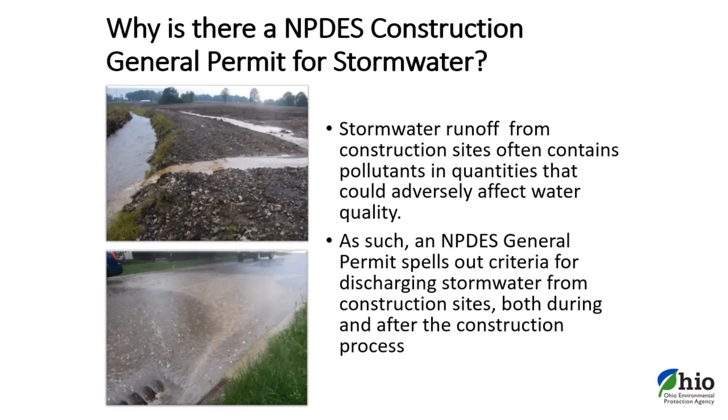Next, we will discuss the impacts during construction. When uncontrolled, runoff can lead to erosion of sediment. Sediment is a leading cause of impairment and adds nutrients to streams. In addition, channels lose capacity and habitat due to deposition of construction site sediment.

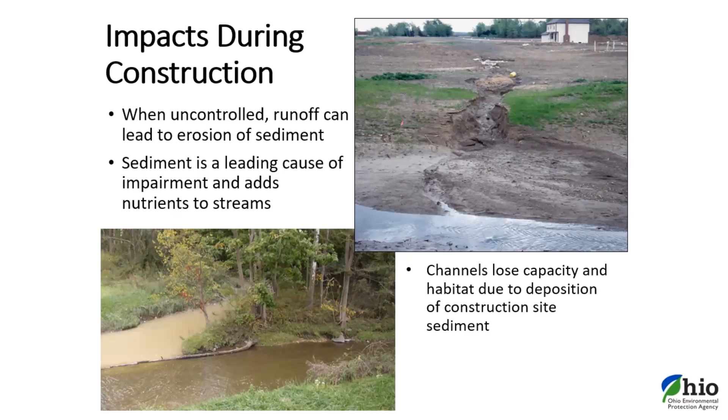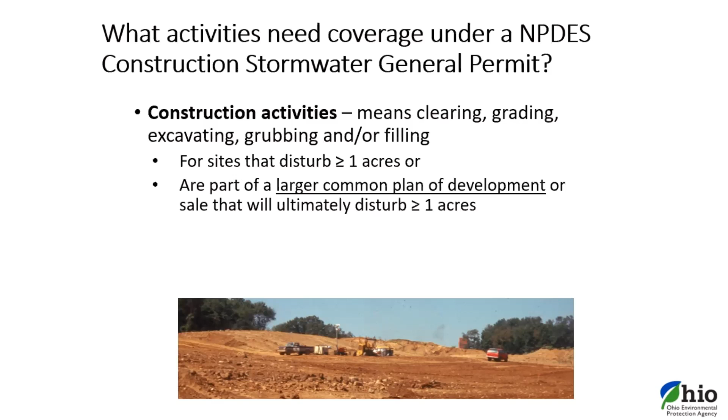Now that we have discussed why you need construction stormwater general permit coverage, as well as potential impacts, let's see what activities need coverage under the construction stormwater general permit. Construction activities means clearing, grading, excavating, grubbing, and/or filling. It does not necessarily mean that building activities are occurring at that time. This would apply for sites that disturb 1 or more acres or are part of a larger common plan of development.

Now let's go over how and when construction stormwater permit coverage is obtained. You will need to submit a notice of intent electronically via Ohio EPA's Electronic Business Center. You will need to certify that you have a compliant stormwater pollution prevention plan. As far as the timing, the stormwater pollution prevention plan must be fully developed for all areas of disturbance prior to the NOI submittal. The NOI form must be submitted at least 21 days prior to construction, and individual lot NOI applications must be submitted at least 7 days prior to the transfer of ownership. As lots are sold, their portion of the SWP3 and responsibility must be communicated and passed on to the next operator.

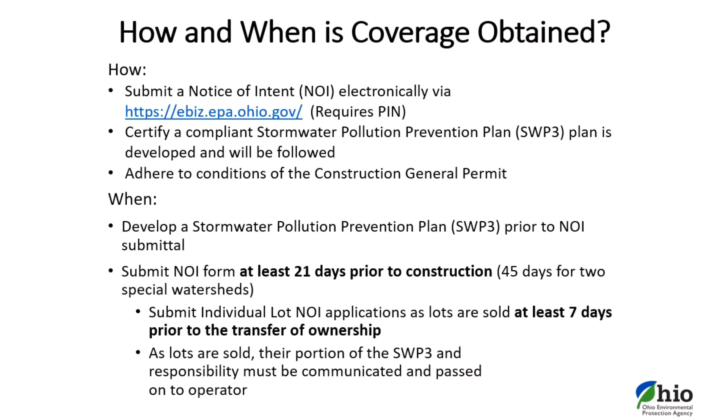Now that we've covered the how and when to obtain construction stormwater permit coverage, let's go over who gets coverage and their associated responsibilities. Operators must submit the NOI to obtain coverage. An operator means any party associated with the construction project that meets either of the following two criteria: the party has day-to-day operational control of all activities at a project which are necessary to ensure compliance with the SWP3 for the site and all permit conditions, including the ability to authorize modifications to the SWP3, construction plans, and site specifications to ensure compliance with the general permit.

Or a property owner meets the definition of operator, should the party which has day-to-day operational control require additional authorization from the owner for modifications to the SWPPP, construction plans, and/or site specifications to ensure compliance with the permit. If there are multiple operators at a site, each one would obtain coverage as a co-permittee.

Now let's go over the responsibilities. In this case, it is presented as a residential development. The developer would be responsible for maintaining all erosion and sediment control measures, except areas that have been transferred to lot operators. Disturbed areas must be temporarily stabilized at least 7 days prior to the transfer of permit coverage for the individual lots. The developer would also be responsible for maintaining centralized control measures even after lots are sold, until a notice of termination could be submitted.

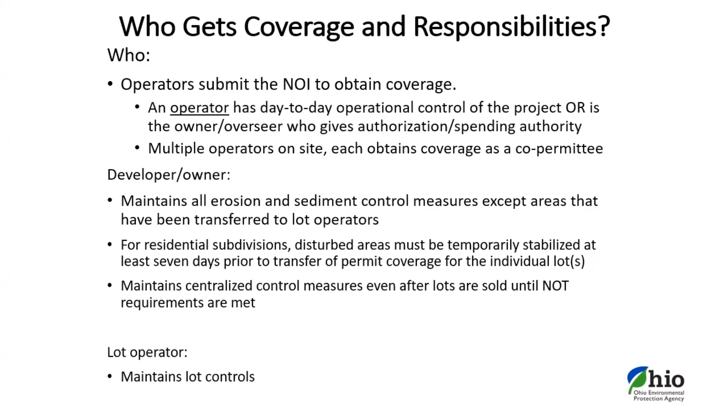A lot operator would be responsible for maintaining lot controls.

Each site has construction inspection requirements. The site must be inspected by the permittee, including lot permittees, once every 7 days and within 24 hours of a rainfall event of a half inch or greater. The areas we would expect to see as part of the construction inspection would be the perimeter, where sediment may leave the site, BMP locations, construction traffic accesses, material and waste storage areas, and near streams, wetlands, or lakes located on the site.

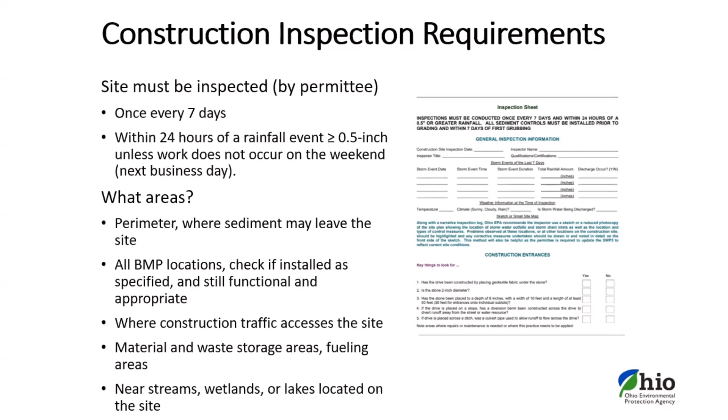Once the project is complete, a notice of termination can be submitted. In the case of a developer, the site has achieved final stabilization for areas that the permittee is responsible for, and all requirements for post-construction have been met. For a lot operator, the lot must have achieved final stabilization, or the home builder establishing temporary stabilization, including perimeter controls for an individual lot prior to the homeowners occupying and relaying the need for and benefits of final stabilization.

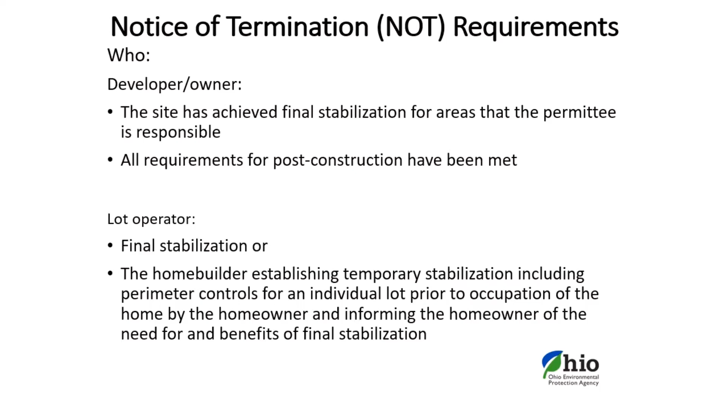In order to qualify to submit the notice of termination, there needs to be final stabilization. So what is it? Final stabilization means construction activities in the SWPPP are complete, vegetative cover is at least 70% growth density, all temporary sediment and erosion controls are removed, and post-construction BMPs, if applicable, are installed.

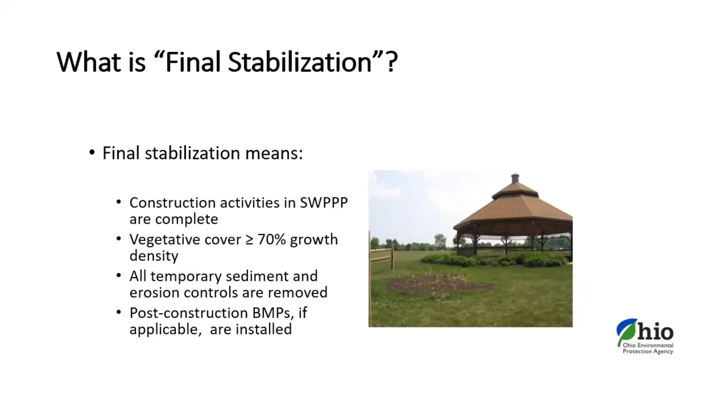Thank you for your time, and my contact information is listed under the Southwest District Office.

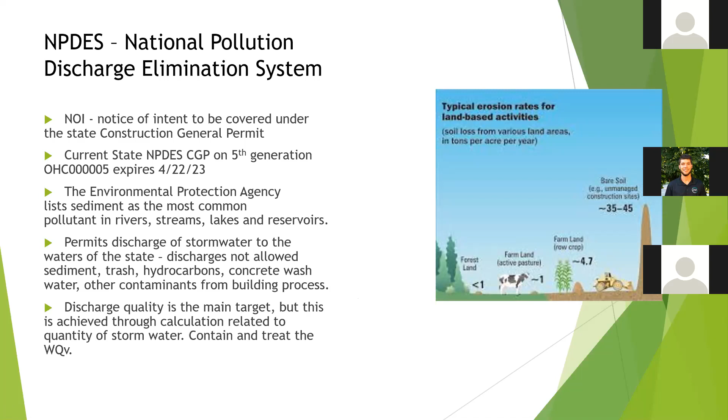So just in general about a stormwater plan, Michelle went over timing and everything like that, but just a general rundown on what is expected: creating a plan, how to implement that plan, and then all the final things you'll have to do in order to terminate your coverage from that permit.

So first, you must make a plan. You must know what your construction activity is going to be and how you can implement BMPs in order to comply with that permit.

Once you've made that plan, as Michelle said, you will then file for a lot NOI. For lot NOIs, you want to do that 7 days prior to your activity. A lot of times that has to do with turnover from the developer to the home builder, so 7 days prior to that turnover is what you're required to do.

Then once you have your plan, you've filed for the lot NOI, and you've received your coverage letter from the OEPA, then you can implement that plan. That's where I see a lot of issues coming up with home builders, is the implementation of that plan. A lot of the stuff is looked at as, I've already taken care of the paperwork portion. But getting your plan actually implemented on site is the most important part, because all of this planning means nothing without you actually doing it.

So installing lot controls prior to land disturbing activity - a lot of times when transferring over from a developer to a home builder, those lots will either be temporarily stabilized and/or have controls on them, and then you have to take that on, assume that responsibility.

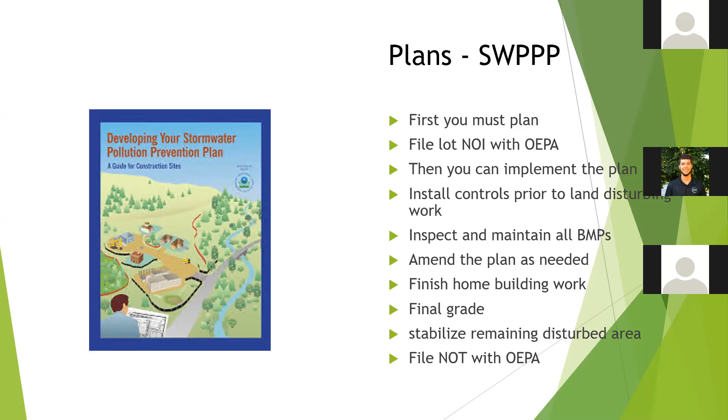So BMPs, tools, and lot controls. These controls are pretty much the same as what's used on a large development, any type of construction activity, but they're just modified down to a single lot construction.

One of the biggest issues I hear from people is their lack of space on those lots. Nowadays we build quarter-acre lots, and it becomes very constrained once that structure is up on what activities you can actually implement. That's where phasing and sequencing of construction activity comes in. We want to make sure we have controls in place. If we run into a situation where we don't have space, or we have other work going on in an area, we want those controls in place prior to that activity so we don't run into that issue.

So the CGP lays out standard controls for post-construction and also temporary BMPs for you to meet those requirements of the permit. And then your plan goes over how you personally are going to implement those controls to meet that requirement.

I will always go back to the big picture, make sure everyone knows and understands why and what we're doing here. The big picture is your uncontaminated stormwater, when it falls from the sky, is uncontaminated. As soon as it hits your land, exposed soil, whatever the situation is, you're going to see it pick up pollutants, and your goal is to not let those pollutants leave your site.

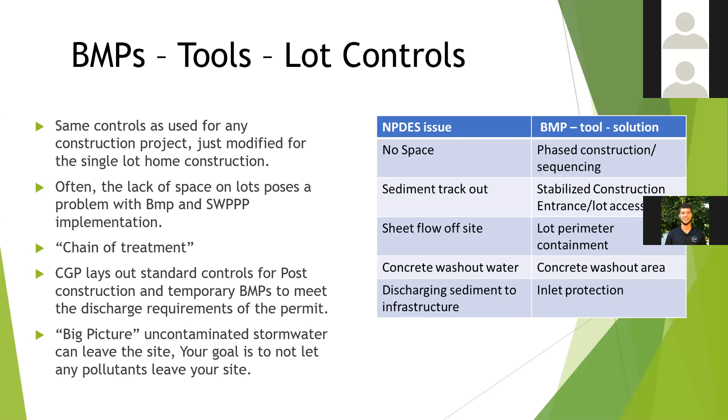On to the next page. So, implementation and installation. Just like building plans, there's certain specifications on stormwater plans. Mainly the point of this is so you have an understanding of how to install them, and also so you have an agreement with regulatory agencies and in the legal sense that you implemented a plan to prevent stormwater from being contaminated.

Typically, these BMPs are outlined in a sediment erosion control plan for the larger development. When you're working with just an individual lot, a lot of times I suggest to my clients to use those sediment controls, whatever they are on that approved sediment erosion control plan that was implemented for the larger development, into your actual home building lots.

So if the plan calls for a certain type of inlet protection or a certain type, size, or length of construction entrance, you always want to try to go by that plan as much as you can. Typically that's approved by the municipality. In Warren County, it's approved by the county, and in some municipalities it's approved by the city or whatever municipality is in charge of that MS4.

There's BMP specifications, like I said, to help you understand the requirements and how to install, inspect, and maintain these BMPs. That's kind of an agreement between you and the MS4 regulatory agency on how you're going to implement these controls, what controls are going to be implemented, and then ensuring that you maintain those controls, which is what people run into the most.

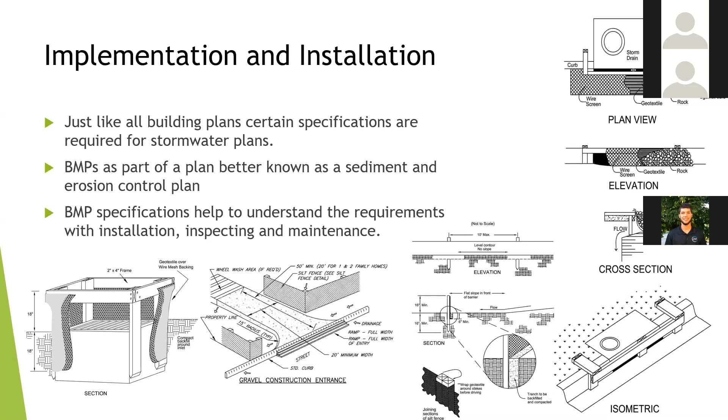So these are just general BMP specs from the Ohio Rainwater and Land Development Manual. That's just the general guide. I'll pop to the next slide here. This is just the general guide for BMPs that are accepted here in Ohio, which the Department of Natural Resources puts out.

The main thing you'll want to look at for specific lots is chapter 6, which is completely focused on small construction site controls. This is just a general overview of what could possibly come up on a certain lot. By no means will all of these apply to you. A lot of situations we do not have a protected stream area at the rear of a lot, so we'll only need the controls that the site conditions require. But it's just a general overview of how to do it.

There's a lot of manufactured BMPs that can also be used and approved through your municipality. But a good rule of thumb is, if it's in the Rainwater and Land Development Manual, it will be accepted by almost anyone in the state of Ohio. So I try to let clients know, here's your base of what you have. If on the sediment erosion control plans for the development there's another manufactured BMP that the engineer suggested, feel free to use that, but you just have to document everything in your plans.

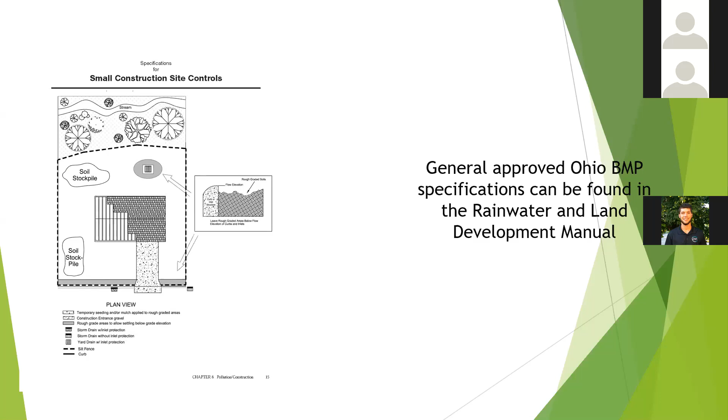But all controls are required to be inspected in order to continue to comply. Each time it rains, you're going to have sediment buildup in front of those controls. That is the point of those controls, to keep sediment from leaving the site while letting stormwater slowly leave the site. They're inspected every 7 days and after a half-inch rain until your site reaches final stabilization.

The main purpose of these inspections is, first off, to catch issues when they come up, but more importantly, to document what you're doing, documenting the inspection findings, what maintenance was done, what new installs were done at that certain time because of site conditions changing.

Anytime you actually have to make a change to your plan, our company put forward the rule of thumb of identifying the 4 W's of that plan change: who made that change, where that change was made, and the what and how it was implemented. If there's a need for a plan change, for instance, a certain control is no longer functioning, silt fence keeps getting overran in a certain area, or whatever the situation is, when you make that plan change, you want to make sure you document everything.

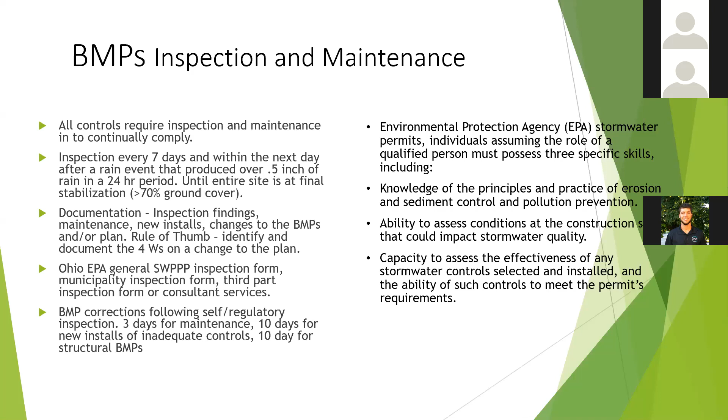And then just the capacity to effectively assess those stormwater controls, making sure that they are implemented according to the plan, meet the requirements of that specific BMP, and make sure that everything on site is compliant in regards to the way they're installed, the way they're maintained, the way they're inspected. The whole deal is just making sure that it's all compliant.

On to the next one. This slide was mostly covered by Michelle. This is directly pulled from the CGP, the wording on what the responsibilities of each developer is when it comes down to sublots, and then how that responsibility is transferred and/or not transferred to the lot ownership.

As we said, filing that individual lot NOI assumes that new lot owner's responsibility to comply with the CGP, and that's pretty much the only way the developer gets out of being responsible for it. Otherwise, they are held responsible.

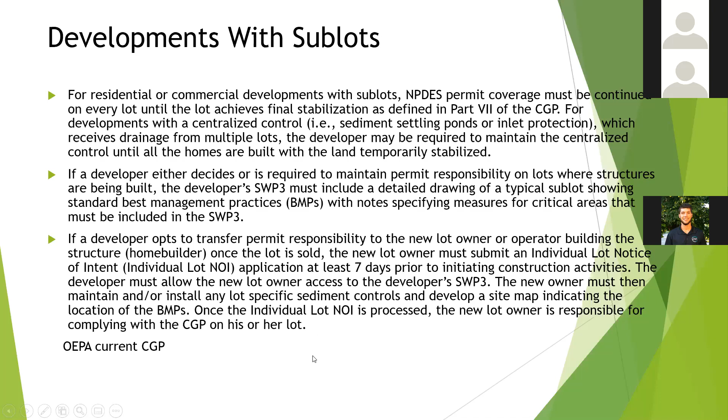So just to quickly run through the filing of individual lot NOIs on the eBiz system — I know Michelle kind of ran through this quickly, and as I said, I have experience in this. If you guys ever have any questions on how to use it, anything like that, feel free to reach out.

When applying on this online system, they have a system called Streams, which is the Surface Water Tracking, Reporting, and Electronic Application Management System. There is a way for you to apply without using that, but you'll have to contact the Ohio EPA and document a demonstrated hardship that leads you to not be able to use that online system in order to submit your NOIs.

That system is just a general EPA thing. You can submit other permits other than just these stormwater ones. But the main thing is once you submit, a lot of these people are going to be doing multiple lots. Once you submit one lot NOI, it saves your information, makes your life a lot easier. Also, when it comes to consulting services, if you have a consulting service do it, they can do the application portion and then delegate that over to you through that eBiz system for you to sign it and also pay for the permit fees.

These two links at the bottom are the guides, the Streams guide and also the EPA guide. Very useful documents from the EPA. I probably wouldn't know anything about this without these documents. So if you ever have any questions, their technical assistance is awesome, but also these documents pretty much lay it right out for you.

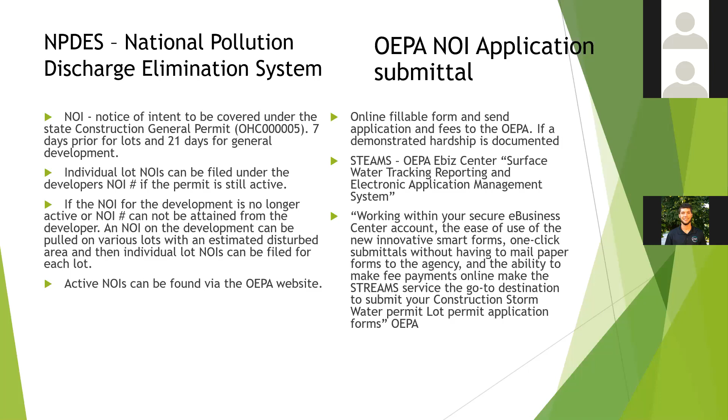So actually filing the NOI, I'll run through this kind of quickly. There's just a few steps to it. The main thing is having all of the information needed for you to submit the application. They actually have a guide that you'll see on my last slide about the process and what's required of filing for a lot NOI. Main thing is, like I said, having all that information ready for when you go to apply. The computer system and applying is not the difficult part. It's making sure you have all that information.

So you'll go to the epa.ohio.gov website. You'll create an account and a login, or you'll log in if you already have one. Then you'll create a PIN that is your electronic signature for this site. Once you're on the eBiz site, there's a bunch of options. That site's used for all of the applications, a lot of permitting that have nothing to do with surface water, nothing to do with NPDES lot construction. So you'll want to make sure you go to the surface water NPDES application section. You'll then be led right to the application.

You'll fill that application out and provide the submittal fees. And then once you've submitted everything, the EPA will then send you an acknowledgement letter letting you know whether issues had come up, or if you get the acknowledgement letter, that means you're covered underneath the stormwater permit.

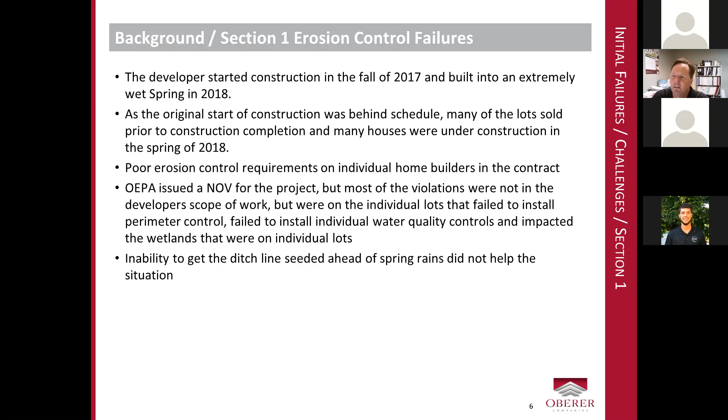So after Section 1 and going into Sections 2 and 3, we did some pretty aggressive moves to fix that. Most notably, these moves were legal contract maneuvers that got put into the lot purchase agreements. Every lot purchase agreement got a very large addendum.

The addendum did a number of things. First is probably the most important: added a deposit in which the home buyer, or the lot buyer in our case, was required to leave money into our accounts for erosion control and other damages that might happen to our public infrastructure during construction of their house.

Post completion of the construction of that house, I do an inspection of that lot, and most of the time we'll just release that deposit. But it does give me some teeth during construction to require the builders to do what they are required under the NOIs and under the erosion control permits, because if they don't, I will spend their money and do it ourselves.

So that construction deposit is very valuable. It also helps—I'm glad Jonathan mentioned the importance of tracking onto the roads. That's an issue we have. It's a custom home community there. I am not cleaning the roads on a weekly basis as I may in some of our builder where I develop and build. So each home builder is required to clean up their own sediment tracked off their own building site.

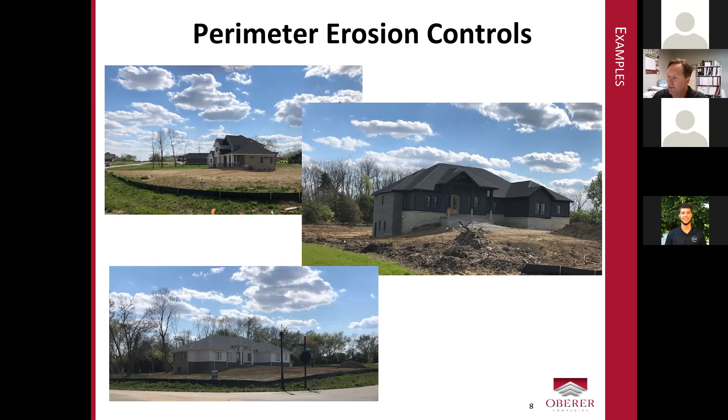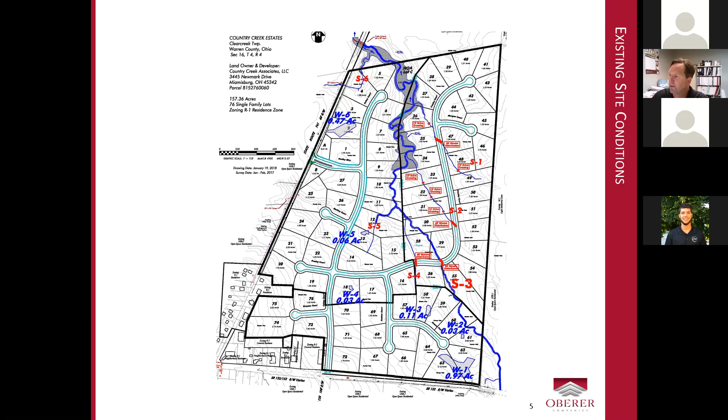And like I showed earlier, most of the lots, or many of them anyway, have a creek or two creeks that go through them. So protecting the homes' construction from entering the creek was, in this case, even more important than during my original infrastructure construction, because that really didn't impact much land, just the right of way of the roads. But the homes themselves made the most impact, and so they created a whole lot more conditions which needed erosion control and sediment features than the original street infrastructure did.

And then we have a lot of individual smaller features to deal with our stormwater. Country Creek, being a large-lot subdivision served by swales, not necessarily storm sewer, didn't really have enough stormwater created to force stormwater retention for stormwater's sake. That being said, we did need to do water quality features, and water quality was going to be needed throughout the development. That was one of the biggest challenges in this whole development, because of the way the lots sloped towards the creeks, they didn't always hit the ditches. Swales weren't always available. I'm a big fan of storm sewers after doing Country Creek.

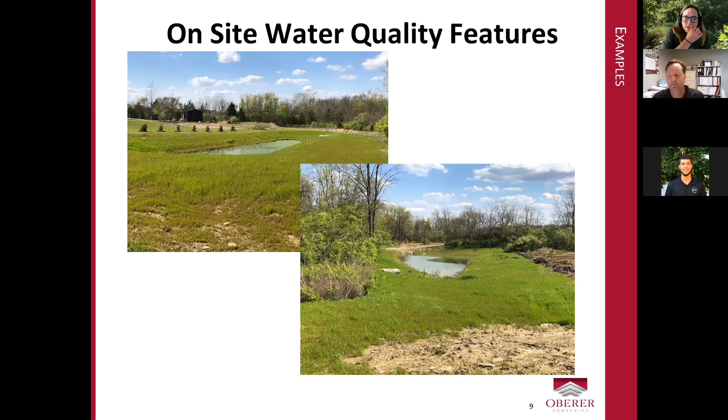We have one question in the chat box. It might be a bit of an Ohio EPA question, and maybe Jonathan you can pipe in a bit. So we have someone who has builders who are having a hard time filling out the lot applications. He's asking if there's a third-party company that can help them with that. The biggest challenge they're facing is you have to reference the permit number or the NOI of the development, and some of the lots are in sections that are no longer active for them as a developer.

Jonathan or Michelle, you guys have an answer? I think I have an answer too. We can maybe—I'll let Michelle go first, and then I'll talk about consulting services.

I would say just give me a call, and then we can check to see whether or not the permit was revoked, because we did revoke quite a few of them in 2018.

How we go about it is, like I said in my presentation, there's a lookup on the Ohio EPA website for you to look up active permits. If there isn't an active permit, you're probably best to go to Michelle to see about whether it was terminated or not. But in regards to the filing of the lot NOIs, we do that as a consulting service, just to file those NOIs.